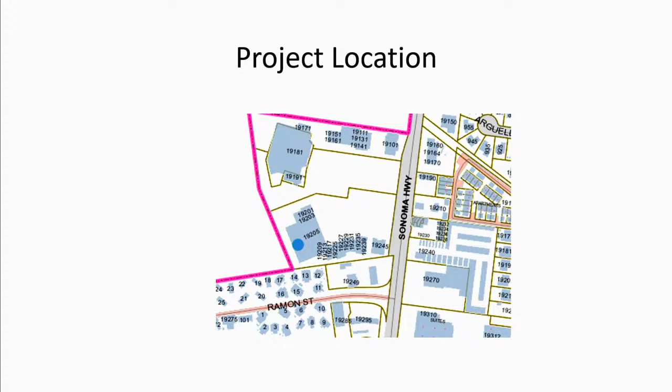With that, we can move into our public hearing portion of this meeting. We're going to start by reviewing item number 7.1, a discussion of a sign application. Staff, can we get a report, please? Thank you, Chair Cormany and members of the commission. This is an application for a sign for Rite Aid at 19205 Sonoma Highway, located in the Maxwell Village Shopping Center, north of Ramon Street on Sonoma Highway.

The site is zoned commercial, and drug-type stores are a permitted use in that zoning district. By way of background, in 1988 the Architectural Review Commission approved a sign program for the Maxwell Village Shopping Center, which allows the subject tenant space one 48-square-foot wall sign on the building face. In 2014, the Design Review and Historic Preservation Commission approved a new 66.5-square-foot illuminated wall sign for the Rite Aid, which is considered non-conforming. Earlier this year, this commission continued the sign application for Rite Aid to a date uncertain to allow the applicant to revise it to be consistent with sign regulations.

At this time, a new internally illuminated shield channel logo wall sign for Rite Aid is proposed. The wall sign is one-sided with an approximate area of 15 square feet, and the sign area is limited to a shield logo. The sign face would consist of a blue, white, and green aluminum logo can. The Maxwell Village monument sign will also be updated to reflect the name change, but it's not subject to this commission's approval, and it is consistent with the sign program.

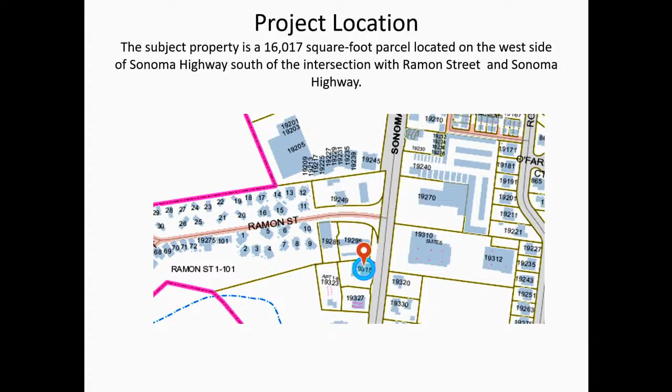Thank you. So this is the discussion and possible action to approve a modified sign application and modified design review application for a cannabis dispensary.

Just a moment. This is strange. What's displaying on my computer isn't displaying in the virtual world, so just give me a moment here. That's fine, we'll be patient. Thank you.

Well, how about I'll give my presentation and you can pretend to see what I want you to see. And if I need to pull out the drawings, we'll do it the old-fashioned way. That's fine, seeing how we've all reviewed this in person anyway, thank you.

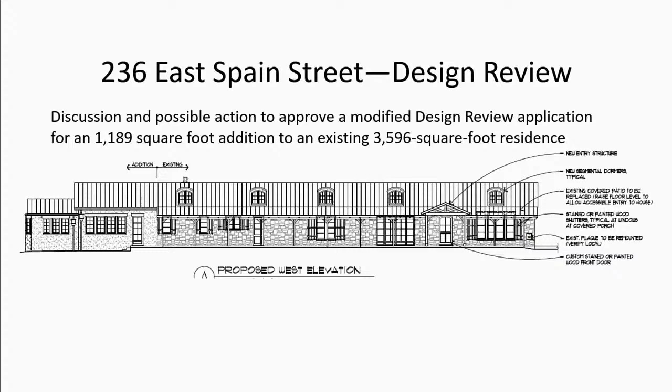Well, we get the presentation on the first screen and then it doesn't advance for whatever reason. And that's one of the quirks we were mentioning at the very beginning of the meeting. We haven't quite figured everything out with this dual system here. So back in 2020, this commission approved the design review application for an addition to the residence.

At this time, the applicant is proposing modifications to the approved application, consisting of changing the 5 new dormers to increase the natural light in the home. The dormers have been revised to have curved roofs and arched top windows. The existing asphalt composition shingle roofing will be replaced with standing seam metal roofing.

The existing vinyl windows and doors will be replaced with new aluminum clad wood windows and doors, or steel doors and windows, either in conjunction with or in place of the aluminum clad units. Two additional windows are proposed on the south elevation, and the shape of one of the windows has been revised to have a curved window, and the pergola has been removed.

On the north elevation, the existing windows will be replaced with a bay window pop-out. And on the west elevation, the new addition at the rear of the property was extended by about 5 feet to provide additional interior space. To maintain the proportions of wall to window that was previously approved, an additional window was added to the west elevation, resulting in a bank of 4 windows.

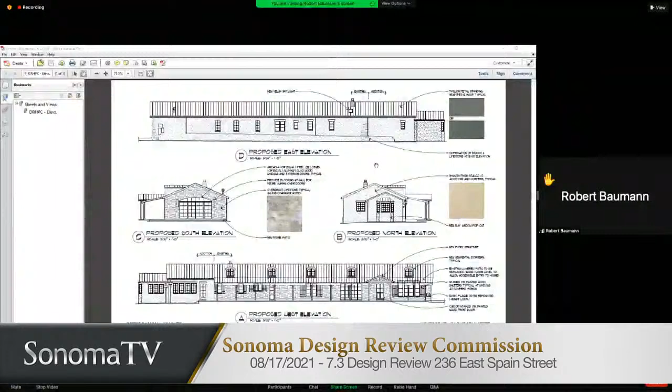I think we've lost our technology. We're just not seeing it through the equipment here. Please bear with us, we're having some technical challenges. The power could have also gone out. I don't know, it's a possibility.

Hold on, just let me confirm with the tech people. Thank you. Bear with us for a moment, we're checking on some technology issues. We're trying to figure it out, there may be some power outages, we're not sure what's going on. We'll be with you in a moment.

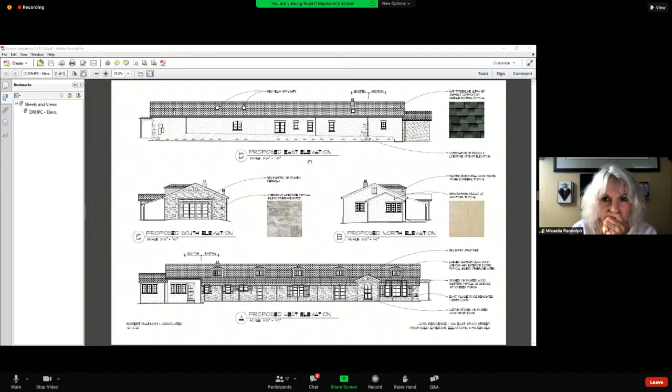So Mr. Baumann, can you provide your comments please? Yeah, so what I'm showing you right now is the previously approved DRHPC submittal showing the west elevation. And then what I'm going to show you now is the current request for approval. There's very little difference.

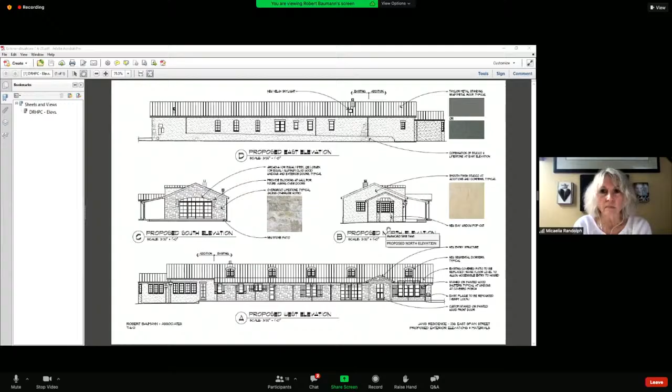Thank you, this is Alan Saggy again from 363 Las Casitas. Mr. Baumann, I'm interested to know how many feet you're extending that original roof line, the tall roof, not the lower part. But apparently you're extending it, and it will cover the Alberigi's whole backyard, so it's really encroaching on their light and enjoyment of the backyard. You're going to extend that tall roof all the way out. There is no second floor in this house, as I understand, so the roof with your dormer windows is going to allow a lot of light in. But I'd just like to know how many feet you're extending the tall part of the roof to the north. Thank you.

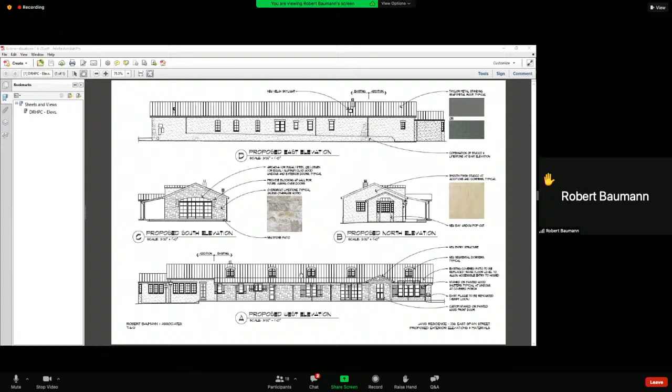Okay, so the higher portion of roof is being extended approximately 4 feet more to the north. And the configuration that was already approved by this commission in the previous version, is that correct? That was, yes. The previous version was 4 feet less of an extension of the upper roof, and now we're asking for 4 feet for that upper roof to be extended, and that's in addition to the lower roof. The lower roof just got moved out. It's the upper roof that got extended 4 feet. Thank you.

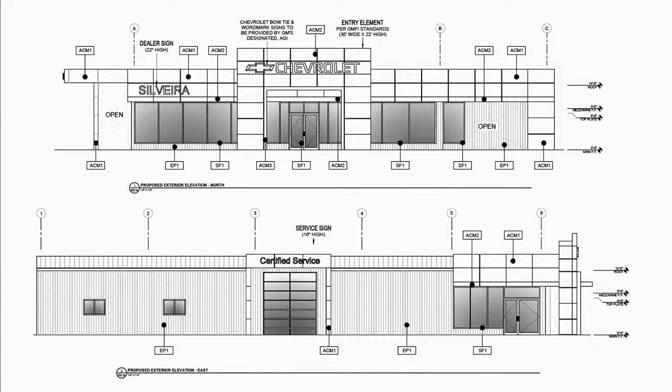Here's a drawing of the signs. You've got the Silveira sign, Chevrolet sign, and the certified service sign. And this is a photo example of what it would look like.

This project is not subject to Planning Commission review, so this commission has discretion over the project. With regard to design review, the proposed external building modifications consist of removing the existing fabric awning. A national iconic main element entry will be installed and flanked by horizontal banding in a smooth aluminum finish that wraps back to the service block of the building.

A new storefront system consisting of 4.5-inch by 2-inch aluminum frame with custom sized clear glazing is proposed. A new service area canopy is proposed on the east side of the building, which will extend 15 feet from the building. New paint colors are proposed.

The new entry element, canopy, and main body trim is proposed to feature ACM 2 aluminum composite metal, Alucobond bow tie blue. The accent trim and entry element interior is proposed to feature ACM 3 aluminum composite metal, Alucobond natural brushed silver. The main body on the north and west elevation entry element is proposed to feature ACM 1 and SF 1 aluminum composite metal and SF Alucobond silver metallic cool.

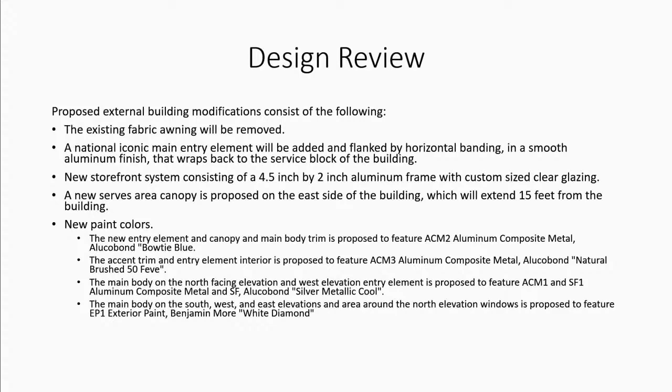The main body on the southwest and east elevations and area around the north elevation windows is proposed to feature exterior paint, Benjamin Moore white diamond. And again, this is a picture of what it would look like.

2 new light features are proposed: 3 Guardco wall-mounted LED wall sconces and 20 Guardco pole-mounted LED small area lights. A lighting plan demonstrating the dispersal of light was included in the staff report. This is a picture of the wall-mounted sconce, and this is the pole-mounted fixture.

With regard to building height and setbacks, the vehicle sales establishment is located in an existing commercial building and no new additional building area is proposed. A 15-foot front and street side setback is required. The entry element and service area canopy shall be set back at least 15 feet from the front and street side property lines, and this has been included as a condition of approval.

There are certain findings this commission must make in order to approve the sign application, and certain findings to approve the design review. Staff is recommending that this commission approve the sign application and design review application subject to findings and conditions of approval. That concludes staff's report.

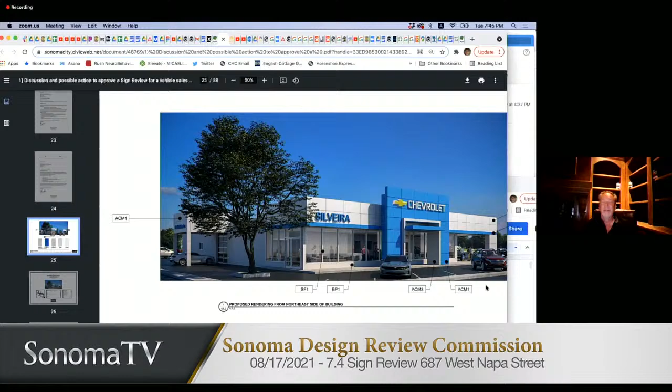I do have a question. You talk about the cantilever on the service sign and moving the posts forward. Isn't that about where you're going to open the door of your car? Is that you're putting the post in a position right where you're going to open a door into it? Very observant, but there's enough width there, it's like pulling into your garage. It's going to be far enough spread as long as you're centered on the 20-foot wide roll-up door. Then you should have ample room to open your door.

Okay, thank you. Are there any public comments either online via Zoom or in the room presently? We need a moment to check for the online version. I see no public comments at this point.

At this point, I'm going to close the meeting to the public and bring it back to the commission for discussion, and we'll start with Commissioner Randolph online please. Sorry, I do see one hand. Oh sorry, hang on, I'm going to go back and open the meeting to the public.

We do have a comment. Is this an online comment? Yes. Bennett, are you wanting to talk on this item? Mr. Bennett Martin, are you interested in commenting on this item? Yes, if that's appropriate. Sure, go ahead.

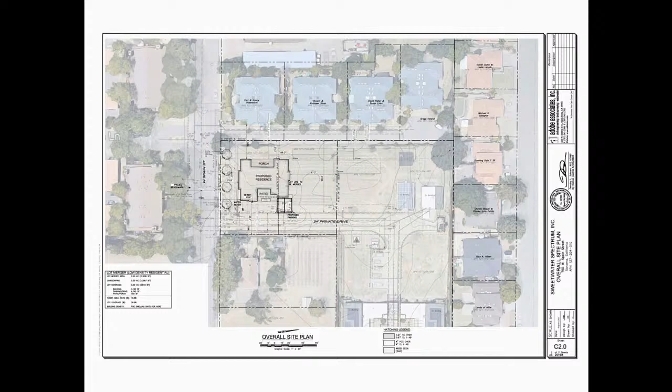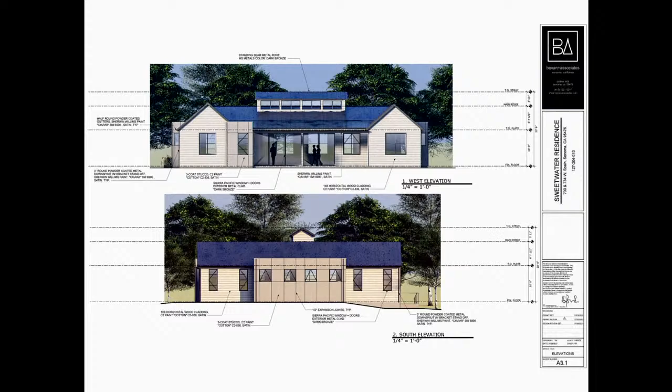And the design review findings. Staff's recommendation is that the Design Review and Historic Preservation Commission recommend approval of the design review to the Planning Commission. Are there any questions?

I have one question for staff. So the existing lots are essentially vacant except for a solar array, is that correct? Correct, yeah. It's a back exit into the facility, so there's access from 5th Street West and from West Main Street. There's the fence, there's a gate, and you can pull in from the back. Sometimes they use it for a little produce stand right off of West Main Street. And there's the driveways there already, and you kind of drive up, and it looks mostly like a field. There's some trees that are in front of the fence. Thank you.

Any other questions for staff? Including online? I don't know if we can see Commissioner, where are we at with that? I don't. Commissioner Randolph, are you there? Let me transfer. You should hear her now. Okay, any questions from Commissioner Randolph? I have no questions, thank you. Okay, is the applicant available?

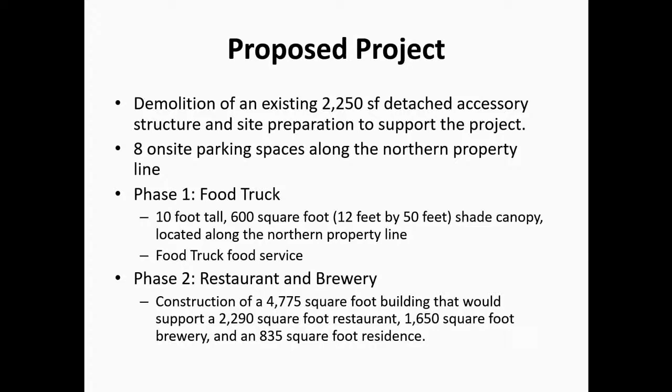Have the staff report. In the interest of our very long agenda, I am going to fly through the presentation because this was continued from June, I believe. So there are very minor changes to the project that was before you previously, and the primary concern was the issue of the signage. The roof sign has been eliminated.

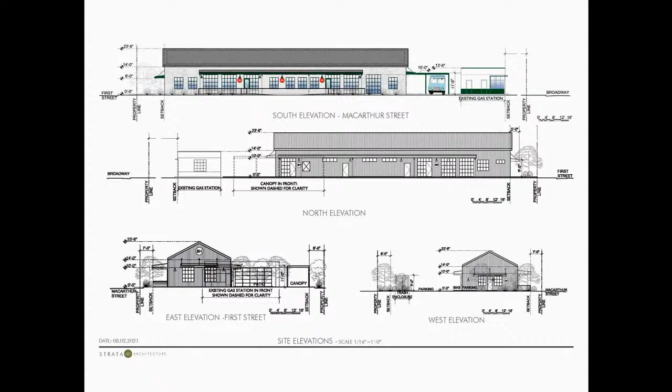And now what is being proposed on the south elevation are these 3 red BH logo signs, and then a larger one up on the apex of the building. The colors, the materials are the same. The size of the building is the same.

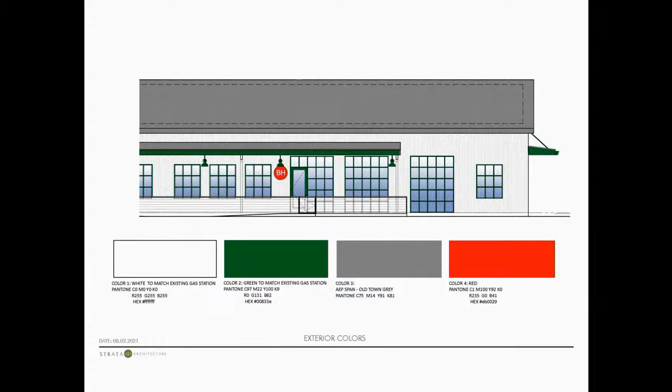There was some correspondence from neighbors raising concerns about some use permit issues that will be addressed by the Planning Commission, notably the size of the residential component and some issues with the potential use of the property. But again, that is a use permit issue that will be discussed at the Planning Commission.

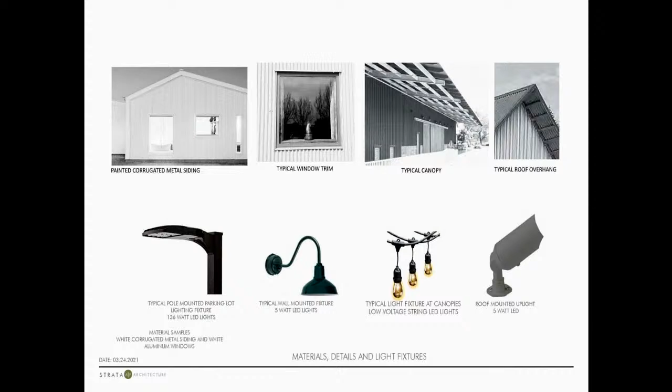So the proposed landscaping, lighting, and here's the signage. So the findings of approval. And the motion before the commission is to recommend approval of the sign permit and design review to the Planning Commission. Any questions?

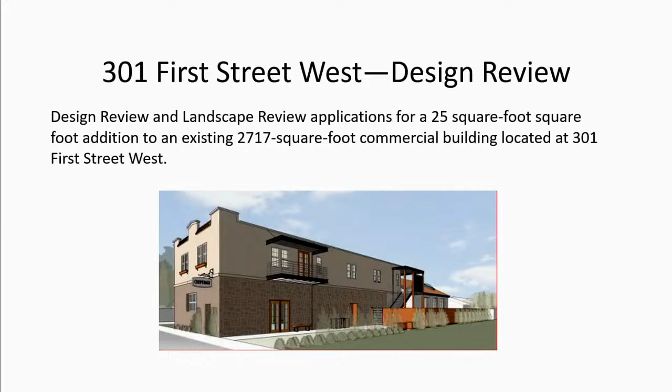Thank you, Chair Cormany. This is the design review and landscape review application for a 25 square foot addition to an existing commercial building located at 301 First Street West, otherwise known as the Cooperage. The project is located just south of where we're located now.

With regard to background, back in 2018 the Planning Commission approved an application for a use permit to allow the adaptive reuse of the historic structure. Later that year, the Design Review Commission approved the design review for the exterior modifications. In 2019, this commission approved design review alterations and a landscape plan for the property. And earlier this year, the city engineer approved a lot merger for the property.

At this time, the applicant is proposing to add a 25 square foot wheelchair lift. The lift is proposed to feature an APV coating, Umbra Grey in color. The metal railings on the balconies and staircases are proposed to be covered in an APV coating, Never Fade Umbra Grey. They're proposing to add exterior lighting in the form of tricot fixtures with custom metal brackets, painted BM blacktop, B-K Lighting Artistar bronze satin finish, and B-K Lighting Ring Mount Delta Star bronze satin finish. A lighting plan demonstrating the dispersal of light on the ground in compliance with the municipal code was submitted.

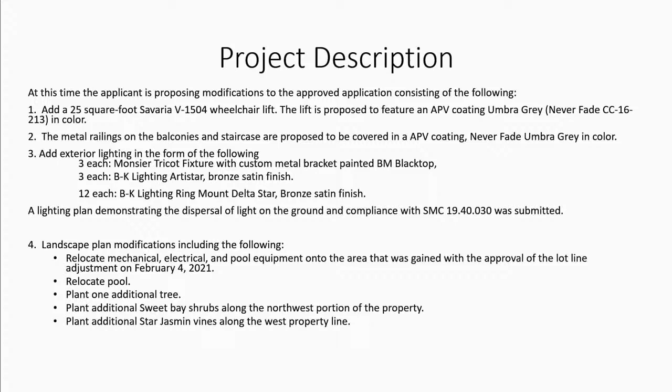And this is what the elevator lift would look like. Here's some pictures of the proposed lighting.

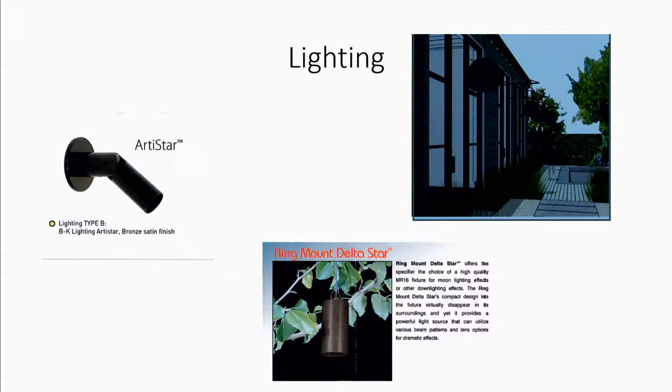The landscape modifications, as I mentioned, include relocating the pool, relocating the mechanical equipment, and adding some additional landscape. Here's the landscape plan that I'm sure everyone can see very clearly. I'm just joking about that.

Water budget calculations were prepared by the landscape architect that demonstrate compliance with the Sonoma Municipal Code, indicating that the proposed landscaping would utilize 85% of the associated annual water budget allotment. The proposal is consistent with all development code requirements. There are certain findings this commission must make in order to approve an application for design review, and staff is recommending this commission approve the design review and landscape applications subject to findings and conditions of approval.

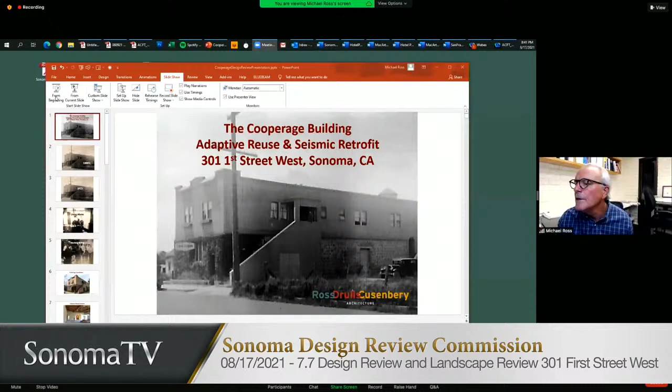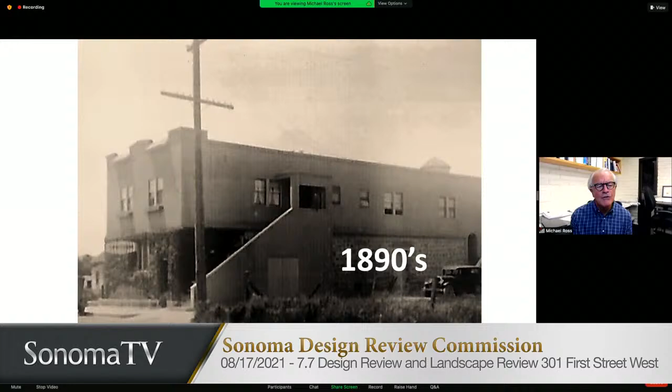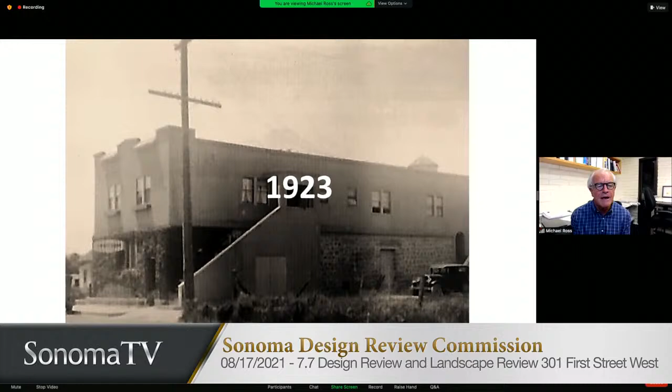Well, good evening everyone, and thank you for your patience in this long agenda. As a matter of interest, I thought we would go back down memory lane on the Cooperage building and take a look at what's been happening. The project has been under construction for a couple of years, and we really appreciated the prior approvals on everything you've reviewed before. The building originally was built, the stone building on the bottom, in the late 1890s, and it was not built as a cooperage, it was built as an ice house. In 1923, a residence was built on top of it, an apartment, on top of the stone work area down below, and it eventually stopped being an ice house and became a cooperage. So it was sort of like an original live-work.

Live above, work below. This is what the project looked like when the new owners purchased it. It was heavily damaged by an earthquake that happened about 6 or 7 years ago in Napa, and it was very weak.

The new owner wanted to adapt it into a residence and a light commercial facility on the ground floor. The interior of this beautiful space, the historic stone cooperage building, looked like this, but it was still in need of strengthening and stabilization.

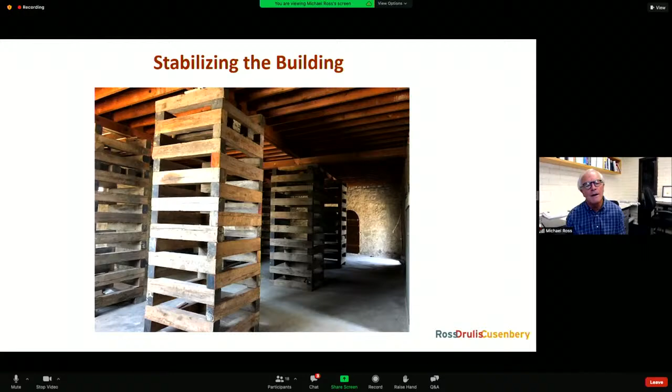So what happened next? We stabilized it and put the entire building up on cribbing like this. Then we inserted a very robust internal steel skeleton that supports the entire building, as well as a structural slab. You can see the rebar there. This is all complete now.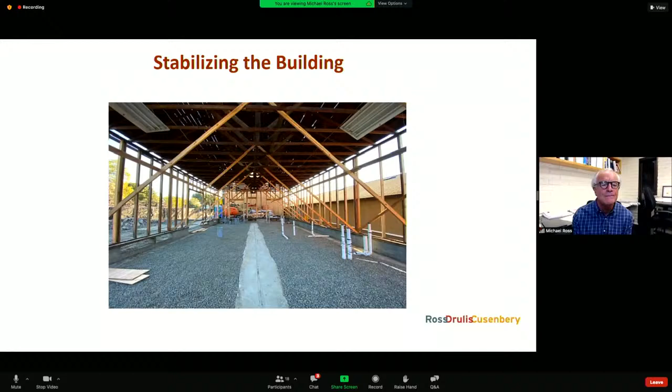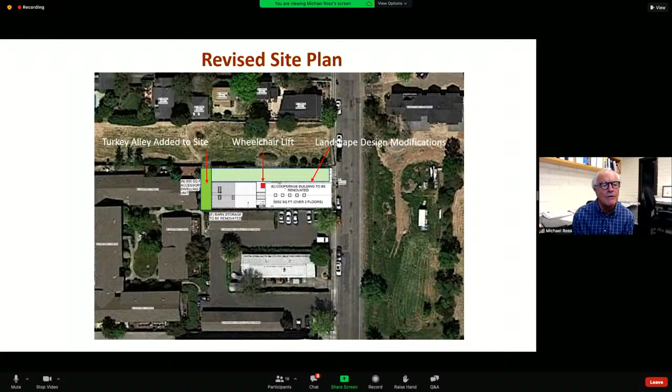Through a legal merger process, it was acquired and added to this property, much to its benefit, because we were running out of space for mechanical, electrical and other infrastructure to run the building. This is basically an overview of the design in 3D: an ensemble of the historic buildings, with a contemporary stairway insertion that separates the two, allowing residents to go upstairs into the in-town residence on the second floor.

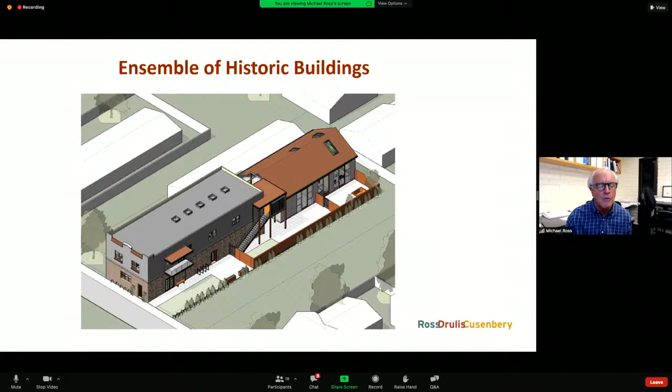Due to the stairs and the need to improve accessibility, we're proposing to place a wheelchair lift, an exterior lift that's going to be inserted into the addition of the stairway system. It's going to be located back here, and it won't be able to be seen.

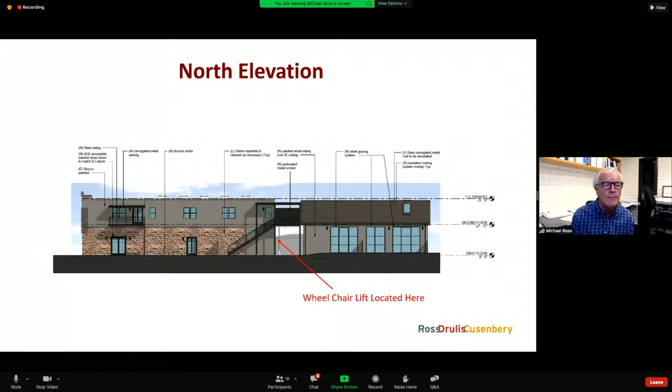You saw the photo of it. It's basically designed not unlike this steel stair system that's being added to it, and it's going to be added right here, so it will not be seen from the street.

This is what's happening today. They're starting to erect this contemporary steel structure with the stairway and the upper deck that separates the historic barn and the Cooperage building. The orange color you see is actually waterproofing and has nothing to do with what the building's going to look like.

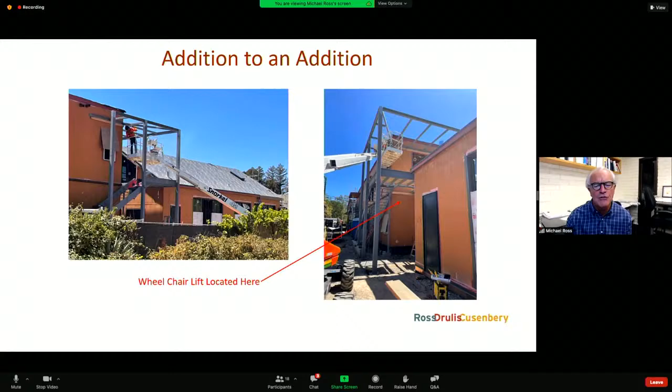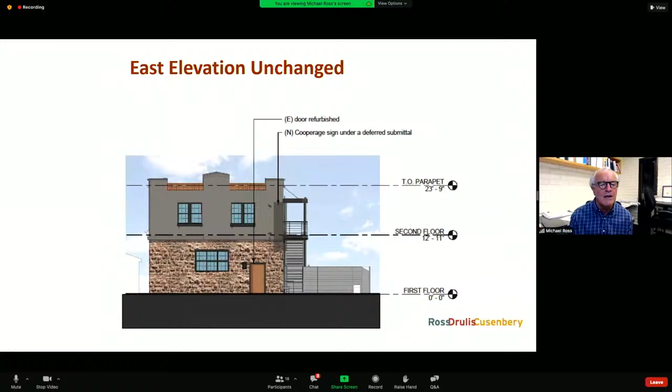From the east elevation from the street, there'll be no evidence of the addition of the wheelchair lift, but there will be some evidence of the landscape changes, which we'll describe. The materials, colors, and finishes will remain substantially the same, excepting for the color of the gray of the wheelchair lift and the stair framing, which is like this color right here.

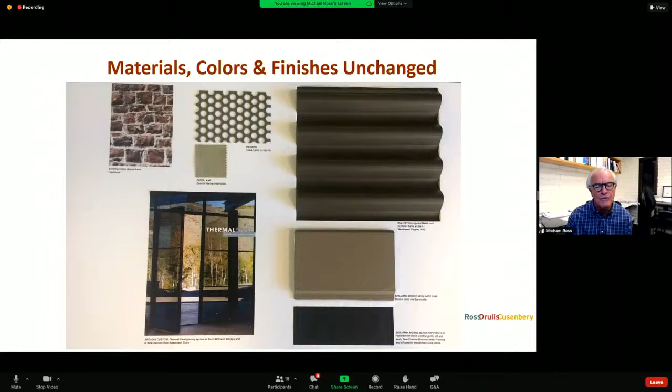It's basically the very same color, just a high-performance finish that doesn't fade, which we selected for the steel. And with that, I'd like to introduce Sarah Kieser to discuss the proposed landscape design changes.

Sarah, if you can unmute. Or maybe you need to mute me. There's a chat from Sarah saying she's unmuted, I believe. Michael, it might be that you need to stop sharing your screen in order for her to speak. Okay, I will stop sharing, let's see what happens. We're working on this, give us a minute for technical issues. I see Sarah in the gallery—can you see or hear her? We can't see her, I can see her. Okay, we can see her now. Christina can see her, but we can't. Now I see her too. Okay, there she goes, welcome. Still no audio.

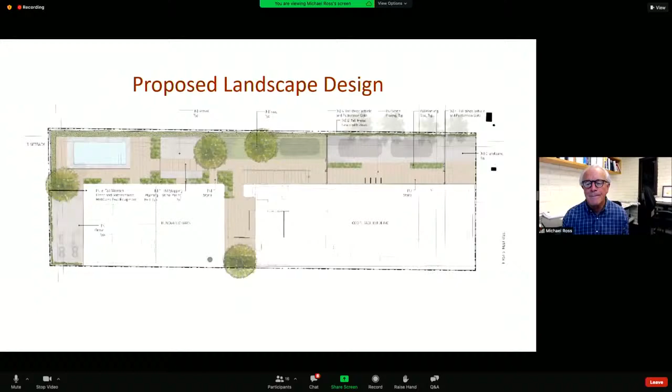Sarah agrees, thank you Sarah. And so that concludes the presentation of this application. I'm available to speak to any questions you might have. And if there's something specific to Sarah, we can do it through chat. I'm going to stop sharing my screen. And thank you for this opportunity to present.

Thank you, we appreciate it. At this time, I'd like to go to the commission. Are there any questions for the applicant from the commission? Seeing some shaking heads, I'm seeing none. I personally haven't - can you describe to me how wide the parcel, this Turkey Alley that you acquired, is?

It was approximately 12 feet wide by the width of the lot, and I think the lot's 50 feet. So pretty significant, and it's a very interesting thing. Everybody knew it was there, all the neighbors knew it was there. And I believe it's a vestige of an old street trace that was going to go through there, cutting through all of those properties years and years ago, maybe a century ago or more.

That street never happened. And so as people expanded their lots into this trace, this became the last dash of it left. There was no owner, no one paid property taxes on it ever. And through a title search and some legal work, they were able to acquire it for this property, which is ideal. It's fascinating, it's a good story.

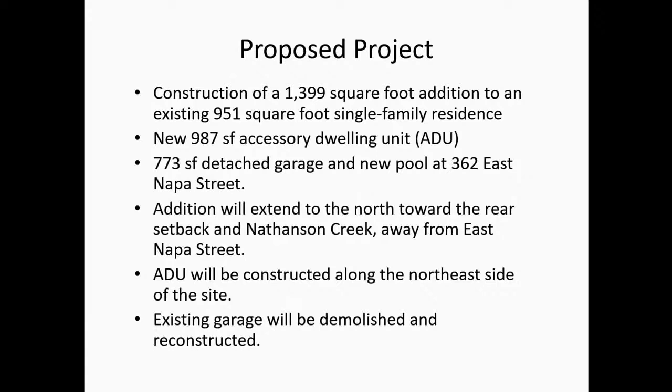Are there questions? Thank you, appreciate your presentation. Are there questions for staff from the commission at this time? Any online? Seeing none. Is the applicant present?

Oh, they're in the room. Would you like to come to the podium, state your name, and give us a little history on your project? Of course, good evening, I'm Matthew Sipple. I'm the owner of Salt Shed Design Build. We're a local design build firm, officed on the plaza here in Sonoma.

So it's a little bit different being on this side of the dais now. At any rate, before I get started, I really want to very quickly thank you again for your support of Sweetwater Spectrum this evening. Having served on the board for 6 years and been heavily involved in that project, your collective approval meant a lot, so I appreciate that.

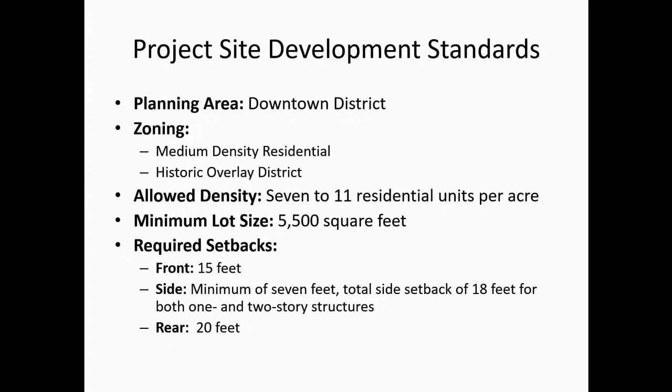You don't need to know all of that, we will just skip ahead. It's a very historic special building in town. There is a historic resource evaluation that was prepared for the project. And in essence, largely due to COVID, the applicant is hoping to better utilize their outdoor space and provide social distancing. They are proposing a new 10-foot tall trellis that would be 168 square feet. It's very similar to some of the trellises that are there now with some slight structural modifications described in the project plans. It'd be located in the northeast corner of the property behind the existing wall and east of the Adobe. It would meet all of the applicable standards and setbacks, and there's no proposed changes to the use or zoning.

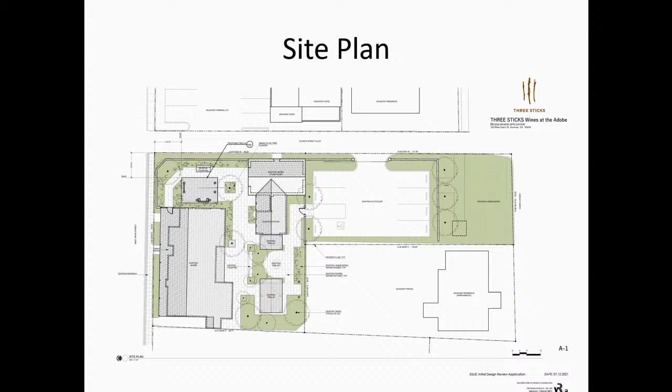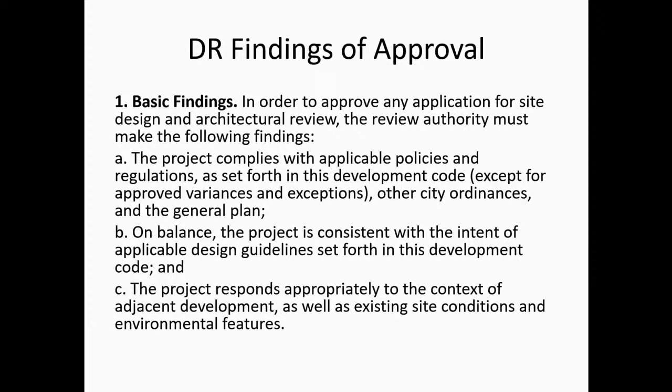Here's the site plan, and it's just tucked in that upper left corner. And the elevations. In order to recommend approval, we have our findings. Staff's recommendation is to approve the design review subject to findings and conditions of approval.

Thank you, any questions for staff from the commission? I have one. How do we address a fireplace under a structure, is that a concern? It'll have to get approved by the fire marshal, and I don't believe it's under it. I think it's to the side, but there are standards in our fire code to address that.